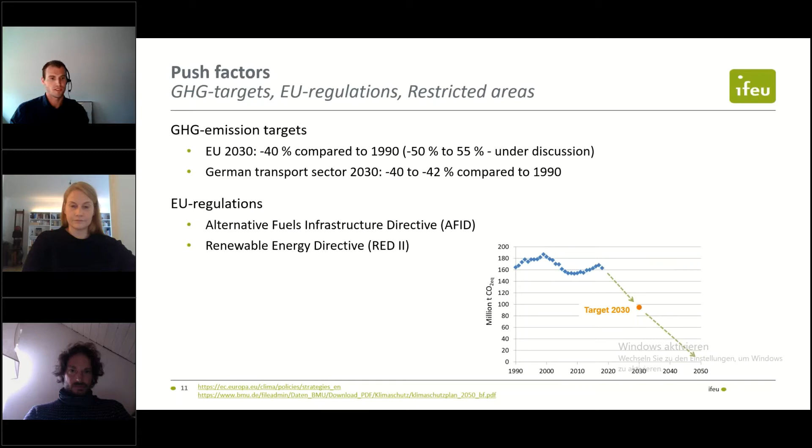And besides the GHG emission targets, there are further regulations which directly or indirectly influence the market uptake of e-buses. For example, the Alternative Fuels Infrastructure Directive, which sets the framework for the development of infrastructure for alternative fuels, for example, charging stations for electric cars and buses in Europe. Another regulation is the Renewable Energy Directive, which sets quotas for the use of renewable energy within the transport sector. And probably the most important directive in terms of e-bus development in Europe is the Clean Vehicles Directive, which we will take a closer look at in the next slides.

The last push factor are restricted areas caused by air pollution and noise, which probably will become more relevant in the future, at least in Germany. In some countries, they are relevant at the moment, especially with regard to air pollution and noise. E-buses offer significant advantages in comparison to conventional buses. So as mentioned before, the Clean Vehicles Directive is a very important instrument to foster e-bus market uptake in Europe. And well, let's take a closer look at the directive.

The CVD is an EU regulation which is in force since August 2019, and it sets minimum quotas for public bus procurement and has to be implemented into a national law until August 2021. In Germany, the Ministry of Transport coordinates this implementation process, and within the regulation, the EU explicitly mentions national financial support to assist this market uptake of e-buses.

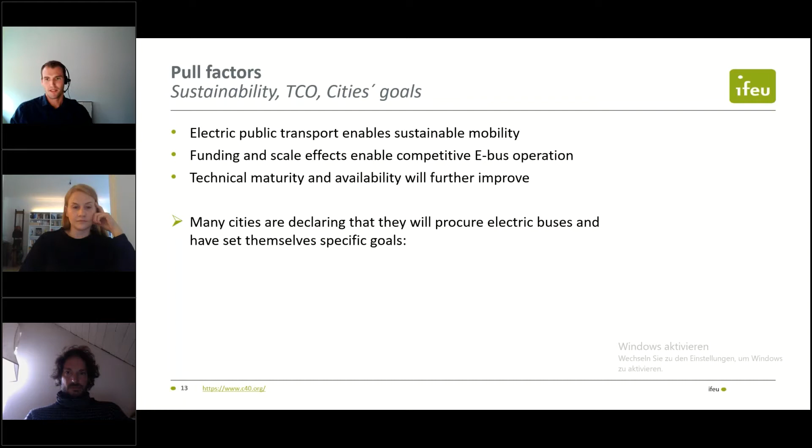These three pull factors are just a few examples. Nevertheless, many cities are aware of these advantages of e-buses and have declared that they will procure e-buses in the future. In addition to that, many cities have set themselves specific goals regarding the future of their bus operation. For this presentation, I've picked some goals from a few cities in Germany, but the actual number of cities which have set goals is even higher and is likely to grow over the next months and years.

In Germany, for example, two cities, Berlin and Heidelberg, where the ifeu is located, have joined the C40 Cities initiative, and the member cities of the initiative agreed to procure zero-emission buses only from 2025 on. And another example in Germany is the e-bus strategy from Hamburg. Hamburg plans to procure zero-emission buses only from 2020 on, and has set the goal to operate zero-emission buses only by 2030.

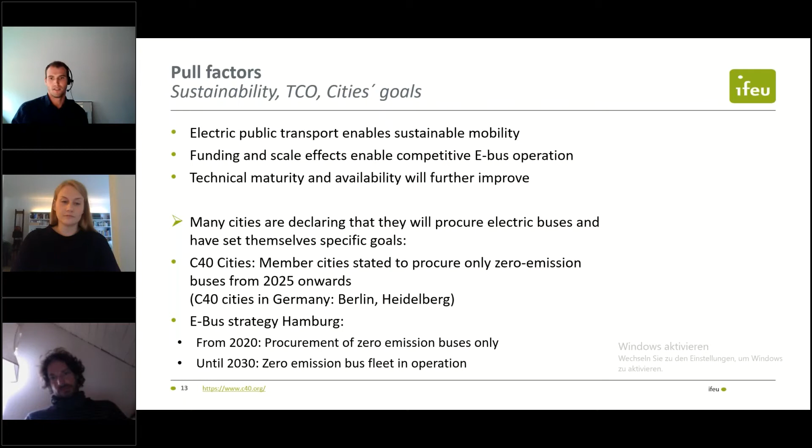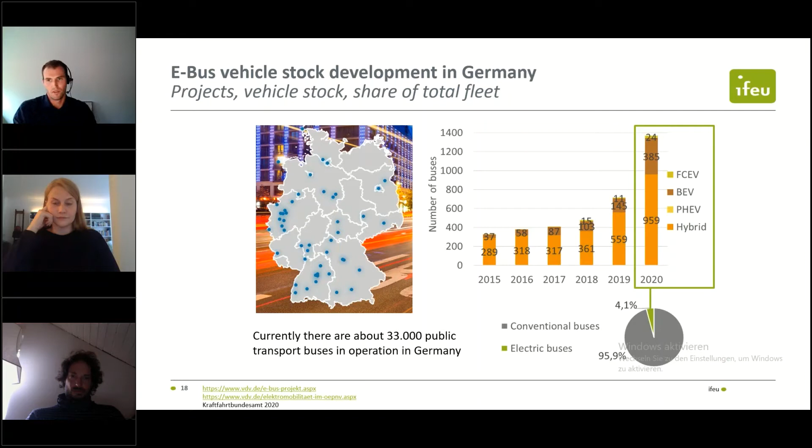And to evaluate the ongoing projects and market situation development, as well as to further accelerate the market ramp up, the Ministry of Transport and the Ministry of Environment have established two supporting instruments. One instrument is the working group Innovative Buses, which is a platform where all relevant stakeholders come together. These stakeholders are, for example, federal ministries, transport operators, the Association of German Transport Operators, OEMs, and organizations from science and consulting. The overall goal of this working group is to promote and accelerate the integration of innovative buses or technologies, which means actually electric buses, through knowledge exchange between the large number of people involved.

And the second instrument is the accompanying research program for Germany's grant program for funding electric buses. The goal of this research program is to analyze the e-bus market and the development of future perspectives for e-buses. And another important goal is to evaluate the bus operation within the funded projects and to evaluate the general effectiveness of the current funding program.

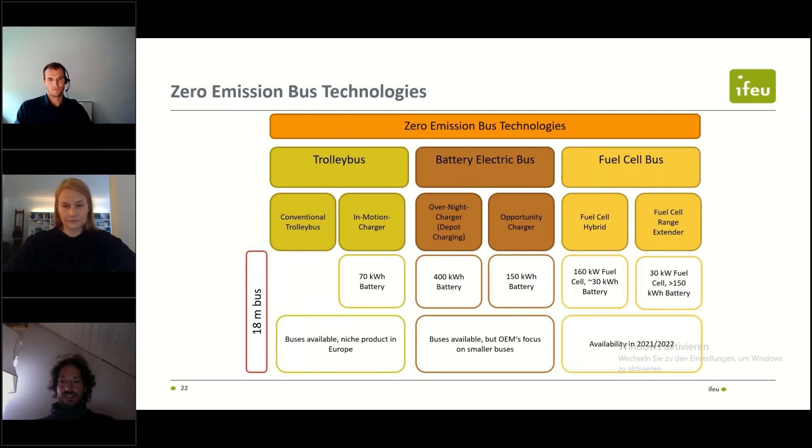And moreover, for the fuel cell hybrid, a 160 kilowatt fuel cell and a 30 kilowatt hour battery. And for the range extender, a 30 kilowatt fuel cell and a 150 kilowatt hour battery.

Because this was already in 2016, there was one thing we didn't anticipate so well. At that time, we thought the fuel cell hybrid would be the more ready technology and the more popular one. But actually, as we see now, things are tending more toward using the fuel cell as the range extender. So anyway, we chose these 4 technologies for the comparison you see in the red rectangle,

which are also available buses. Trolleybuses are available, battery electric buses also from most OEMs. The market is much wider for the smaller standard buses, but there are articulated battery electric buses too. And the fuel cell buses are kind of available, but there's a long time between ordering one and really getting one, maybe in 2021 or 2022. So battery electric buses and trolleybuses are a little bit more available than fuel cell buses.

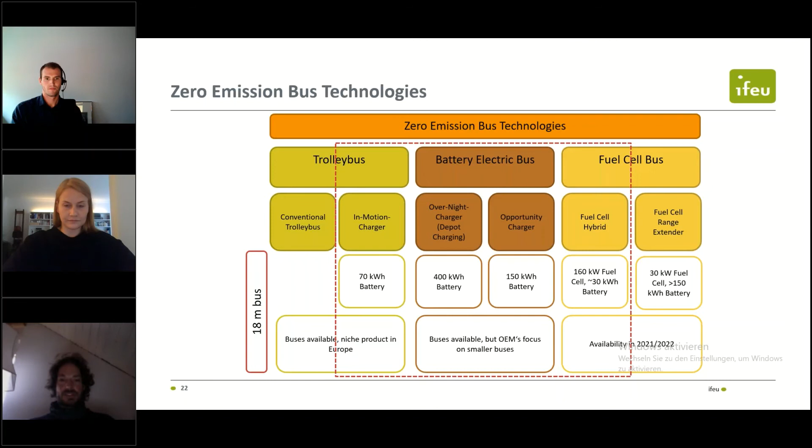On the next slide, we did this comparison for different technologies. I just talked about the scope: zero emission 18-meter buses in the city use case, a bus line with a big bus going every 5, 7.5 or 10 minutes. And what we want to compare for all these technologies is, on one hand, the environmental performance, and on the other hand, the economic performance.

For the environmental performance, we considered different parameters. We call them zero emission buses, but in reality there's nothing like a zero emission bus. They just have zero tailpipe emissions, but at ifeu we always look from a life cycle perspective. So we don't just see the tailpipe emissions, we see the whole emissions during the use phase, including upstream emissions, but also the emissions during production and the extraction of the raw material. We looked especially at the greenhouse gas emissions from all these phases to compare the bus technologies with each other.

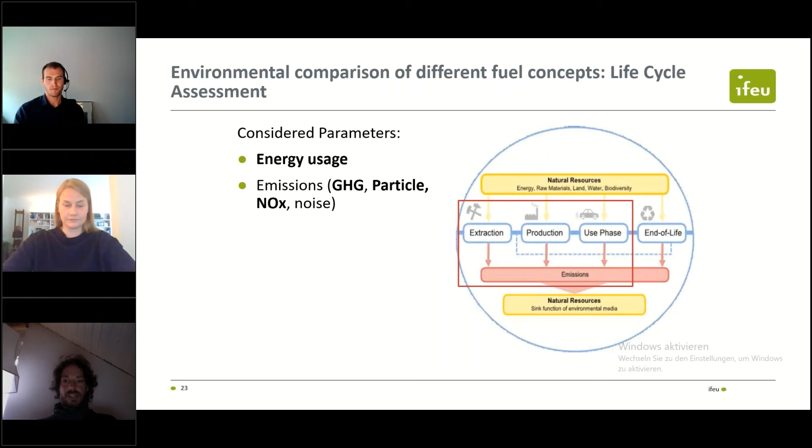How we did this: we were looking at technologies which in 2016 were kind of available, but not really there. But we know a lot from scientific literature and contacts with the OEMs about the specific technology criteria, and we know the material upstream emissions from the EcoInvent 3.1 database. And we did a component model. For example, we had emissions per kilowatt hour of battery, and we scaled it up for each bus technology, or emissions for the electric drive, the fuel cell, or the hydrogen tank.

For the usage phase, we have the exhaust pollutants from the ifeu data bank, but this is just relevant as a reference point for the diesel bus. What is more interesting is that we had the traction energy demand from measurements we did together with the Belicon GmbH, which did these measurements in a lot of different pilot projects all over Europe, and I could say almost all over the world.

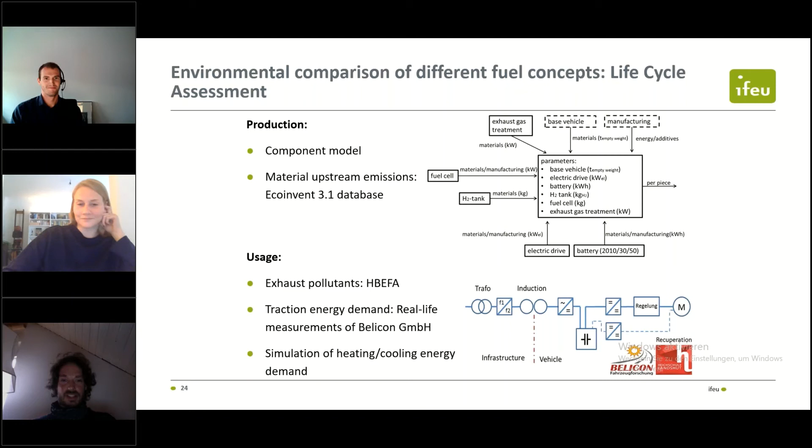So if there are any questions, I can tell more, but for now I just want to go on. But just one point, I think this is always really important if you do some kind of comparison: the data input you have is really the important thing. If you can't trust your data, it's really hard to do any scientific analysis on the kind of technology you would like to choose.

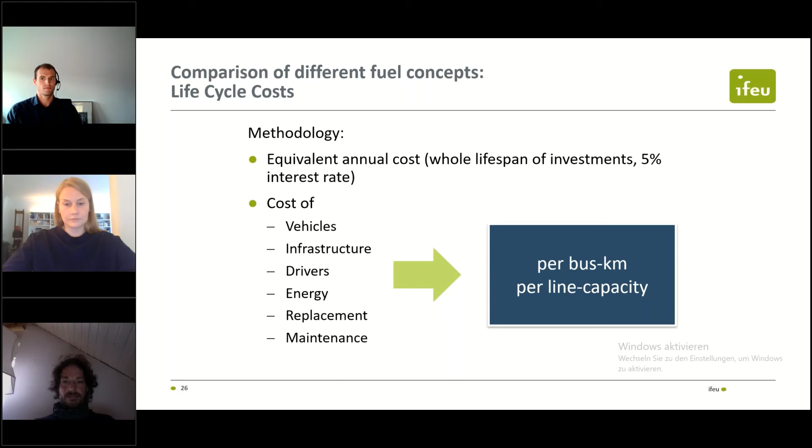Also worth mentioning, these are costs which we took from literature, not actual prices. When you actually procure buses, the prices can vary a lot from the costs depending on your situation: you can have a good connection to the bus manufacturers, a lot of competition, or you order a big fleet. This has big influences on the actual cost, and these are, as I already said, more like generic values.

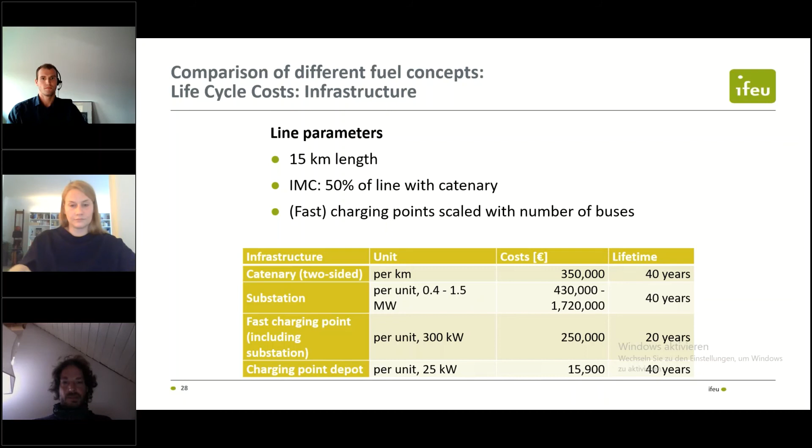So another important thing is the infrastructure, which is also really costly if you introduce a new technology. So if you want to choose a technology for a whole network, then you have these network effects, which are really necessary so you can make your infrastructure affordable in a way. So these are just some things we said for that line, and I'll skip this to come more to the results.

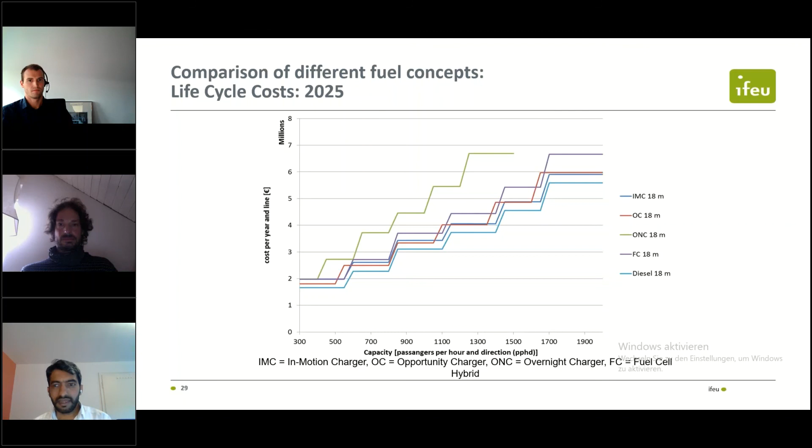Okay, and the next question is directed towards you, Dominik. The question is on slide number 12. You showed two charts showing the Clean Vehicles Directive's 2 phases. That's an obligation for the member states to introduce clean buses and zero emission buses. So what happens if EU member states don't achieve the CVD quotas on public procurement?

So they have to pay penalties if they don't achieve these quotas. But I don't know how much it is, or if it's per share. I'd have to look into the details and double check that. All right, maybe we can send the final answers in the wrap-up email, which we may send to all the participants.

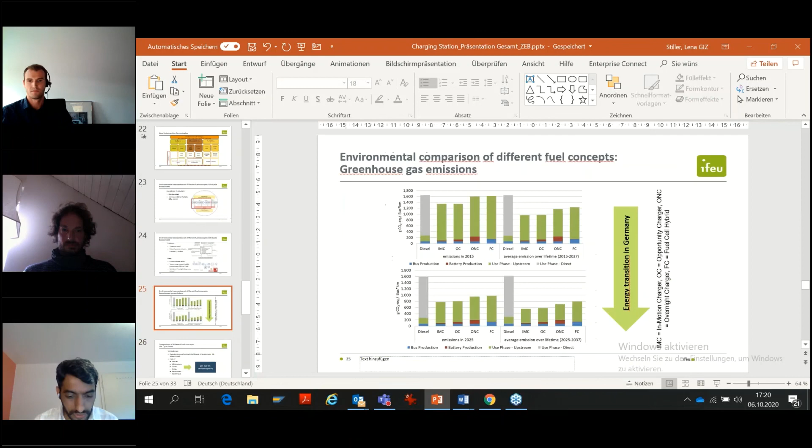And the last question is again directed towards Fabian, and it says on slide number 25, apart from the increased renewable energy, what are the main factors bringing down GHG emissions for different fuel concepts from 2015 to 2025, especially in the use phase?

Yes, so reduction in energy usage. The concepts are getting more efficient, but really the main thing is that a lot of high-emitting power plants in Germany are going off the net and are replaced by renewable energy. So I think this is really one of the core messages from this: if you want a big advantage from electric buses from a GHG perspective, you need a high share of renewable energies. Mm-hmm.